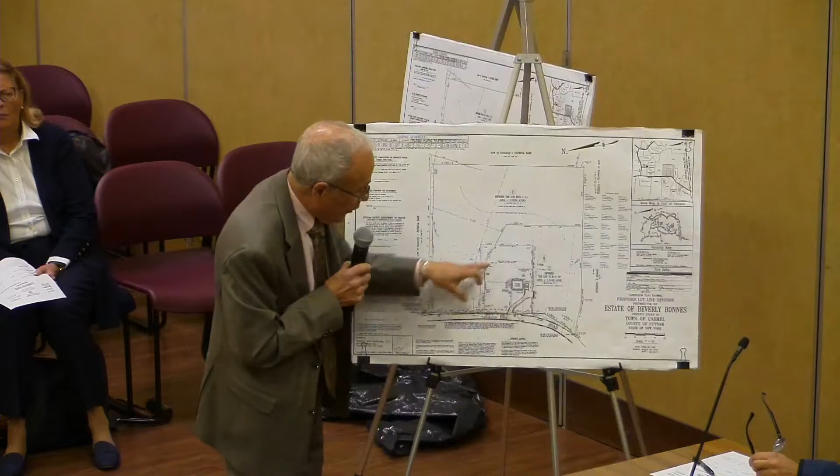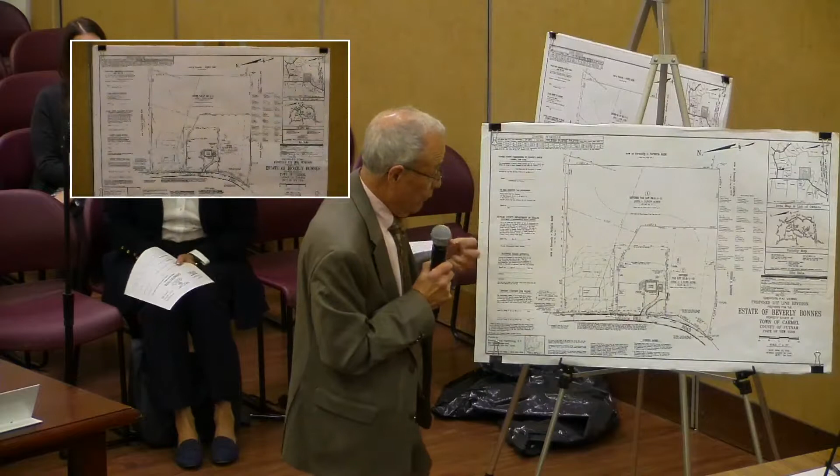That's a very good point, Mike. That's why we had to make the lot the way we did. But the interesting thing is, even though this lot doesn't have 3 acres, the lot width and lot depth are now conforming. We've made the area much more conforming, yet this lot is 3 acres and now is able to have a lot width and lot depth that conform. So we're actually making both properties a lot more conforming.

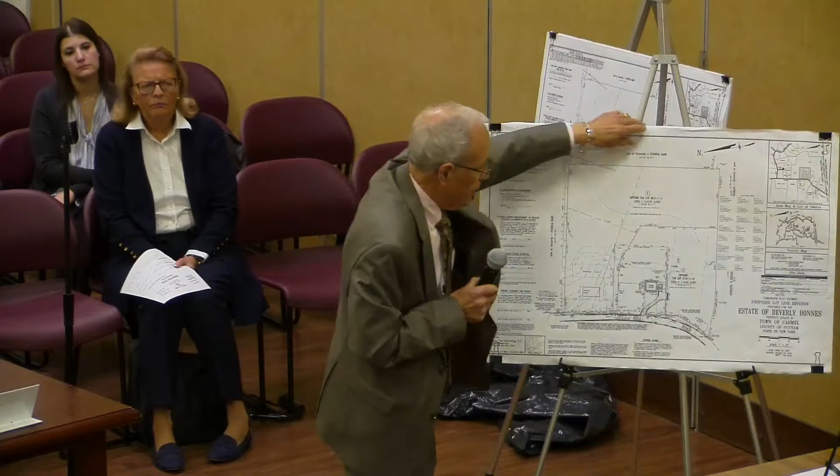Joe, can you trace out the proposed lot line adjustment with the existing house? Well, it's no longer a lot line adjustment, it's now a subdivision.

This represents the lot with the house, and right now, this is 33,000 square feet. This, which is the rest of it, is a little bit over 4 acres. So what we're doing basically is taking this part of the leg of the existing lot and adding it to this lot, bringing it up to 80,000. So this now becomes this.

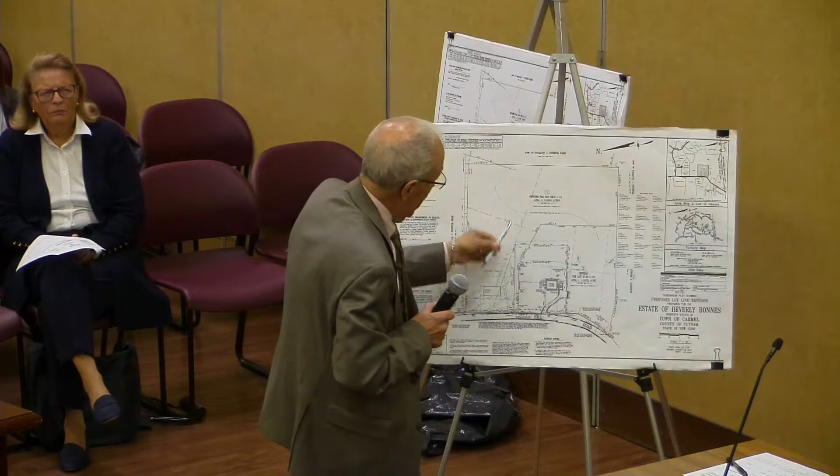As Michael said, we have 3 acres here, but because of the configuration, we're able to create a conforming lot width and lot depth, and this lot goes from non-conforming lot width and lot depth to a conforming one. But again, we need about a 40,000 square foot variance because this lot is 80,000 instead of 120,000.

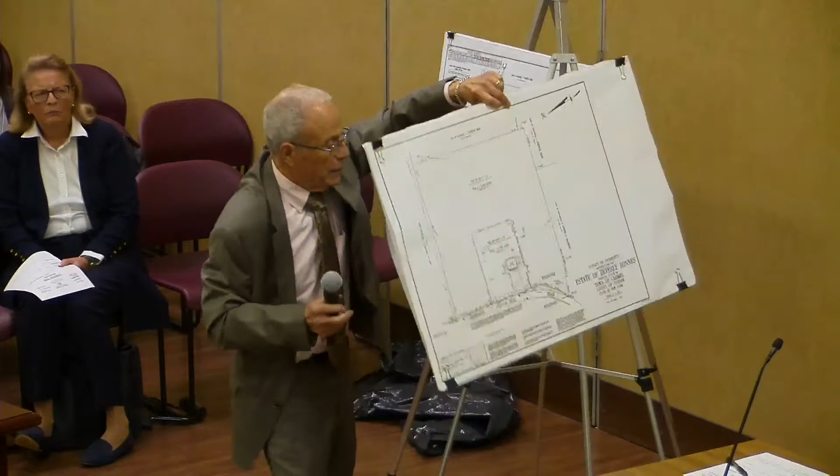Is the building on the left proposed? Yes, this is all proposed. Right now this is all vacant. Our code requires that you make a building lot, you can't just make a vacant lot. You have to show that you can put a house in with a septic or a sewer, depending on what you have.

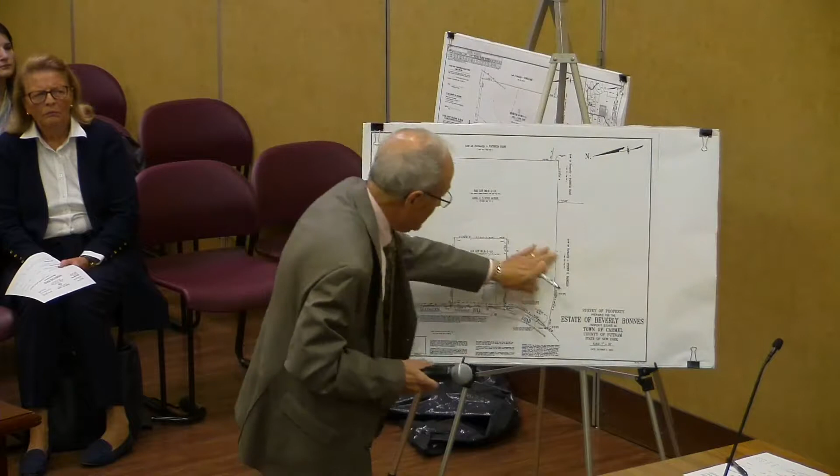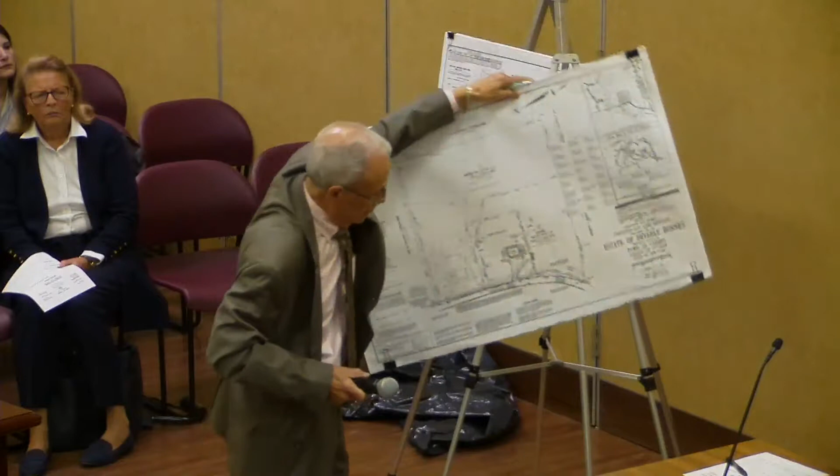So this is what it looks like now. What we're doing is adding onto this lot, getting rid of this out of this lot, bringing it down to 3 acres, just 80,000. And as I mentioned, we did do some testing for the septic system in this area over here. We found that to be acceptable and approvable for a septic system.

Did you locate the existing septic also? Yes, the existing septic is over here, on this house, behind the house. The well is up front, and this new well also will be up front.

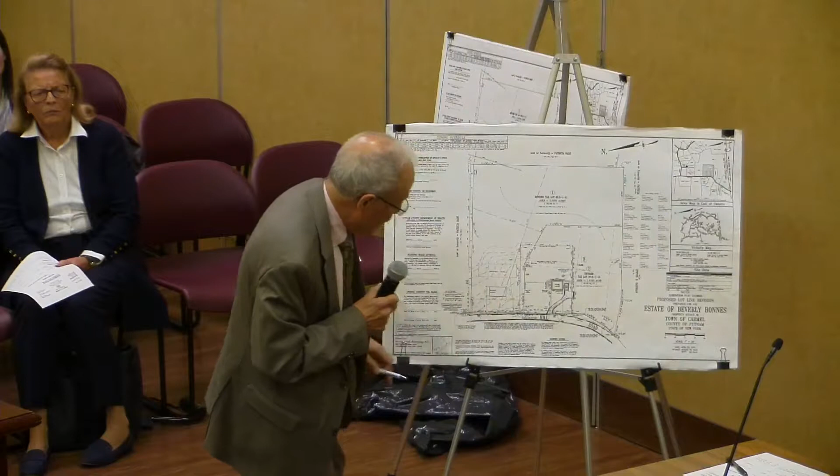Joel, what will be the left lot line of the existing house property? Is that square or rectangle? This is the existing - going on the left side, to your right, there's a box there. What is that? Oh, it's just a fence enclosure like that before going. Oh, okay, all right, it's not a structure. And what's to the left of the property? Bobby, microphone - over here, there?

Okay, is this on the record? Just speaking into the mic. My mic is right over here. No, my mic is off.

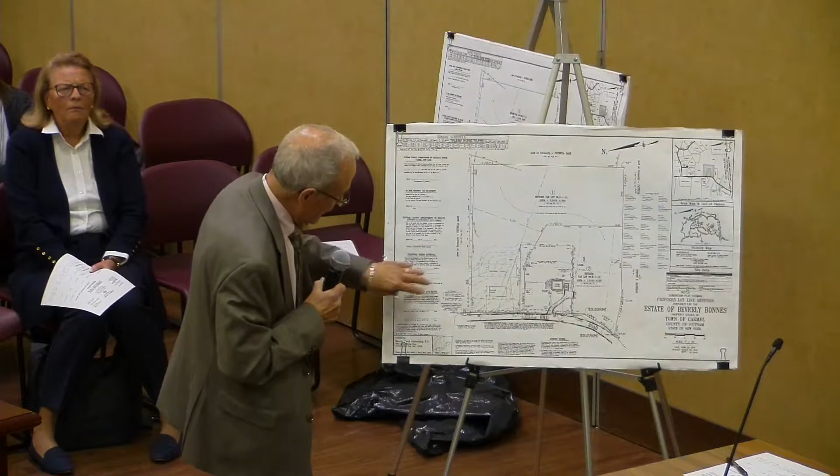There's a big yard over here, and there's a house just about over here where we have the planning board stamp. So this house is over here. Again, wells in the front, septic's in the back, all along the street. Because of topography, it makes sense to have the well at a higher elevation and the septic below.

Are you planning to bring any soil in? No, we tested it here. We were able to get down to the 7 feet that's required by the health department. So we're not taking any soil away, we're not bringing any soil in.

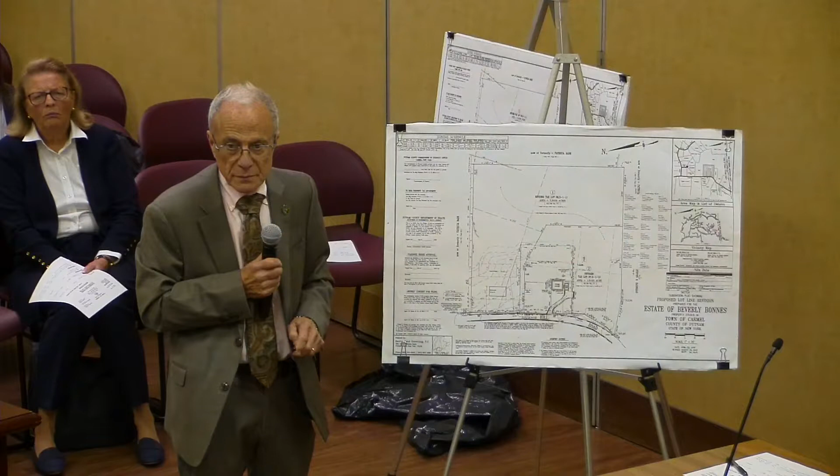But basically, the lot will look just like that? That's to be determined yet. Right now we'll take Joel at his word, but the devil's in the details when we get to the next couple of layers. Right now we're at sketch, so that hasn't been considered. He's saying there's not gonna be soil brought in, so we'll take him at his word on that, but we'll see what happens when the final plans come in.

What are you talking about? I mean, we did do testing here. We got 7-foot deep holes. But if the new people come in and they buy the lot, they may change the topo or do something. There's so many things that could be. But that's not the point, is that once this submission is approved, it's approved based on what we have, our testing.

If a new person comes in and they do something else, we may have to talk about the grading for the house, the grading for the driveway, not just the septic system. So there's more - there may or may not be fill needed for the grade of the house to keep the property level, to make it a level property. Don't know that yet.

Well, again, if you've been to the property, you can see the topo lines here. They're pretty far apart. The grade here is probably less than 10%, maybe 7 or 8%. Anyway, the point is, we can't do anything unless we get approval from the zoning board for the variance. And if they were able to go with the lot line adjustment, they would not have needed the variance, just to be clear.

That's why it was a little different. The problem, as Mike said, is that it's more than 20,000 square feet. That's why it's a subdivision versus a lot line adjustment. It's a technicality in the code that was written a long time ago.

So Joe, the frame house that's there, is there anyone living in that now? Yes. Is it the same owner as the other lot? Yes. And so they simply want to revise the lot lines, create a more conforming lot here, and obviously keep this conforming. So what's the intent with the other property? The intent was this will remain, and this eventually will be sold. So they're not gonna build on it? No, per se there's no plan, it's just a buildable lot - anything can change, but right now the plan is not to build it, yes.

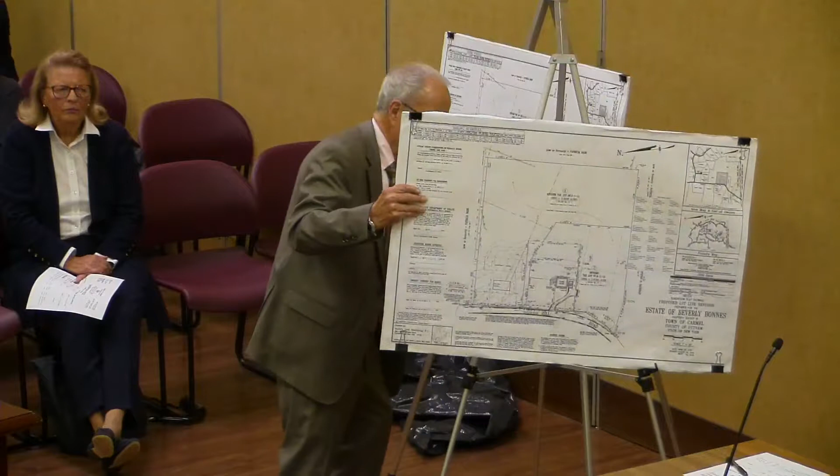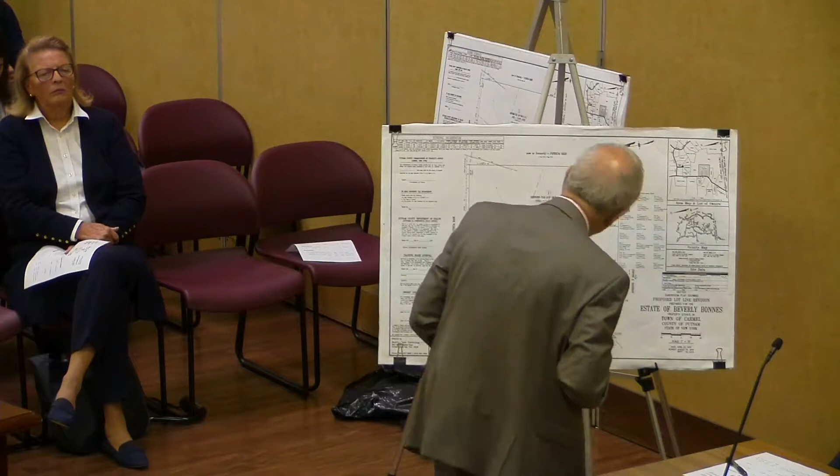What's that road, or some sort of drive indicated coming in with those two sets of parallel lines? What is that, some easement? This is the traveled way, Shandaken. Upper right side of the smaller lot. There, those two dashed lines run through the whole lot. What are those, and what's that other set of dashed lines coming in from the side? Is that an access way, a driveway, what is that?

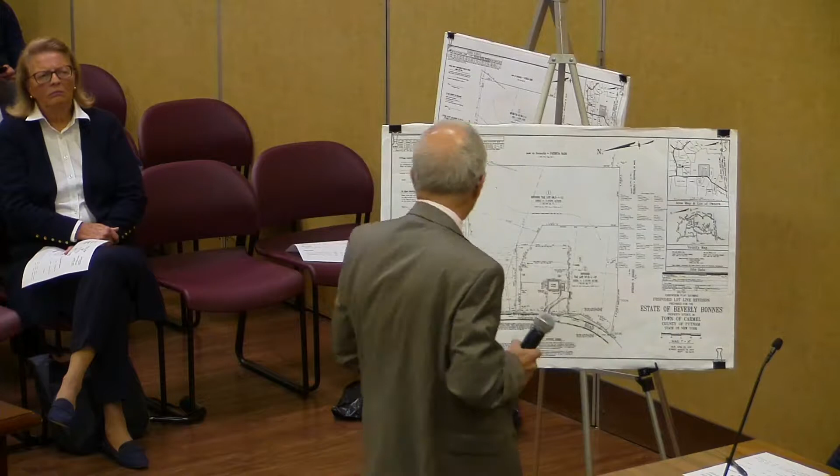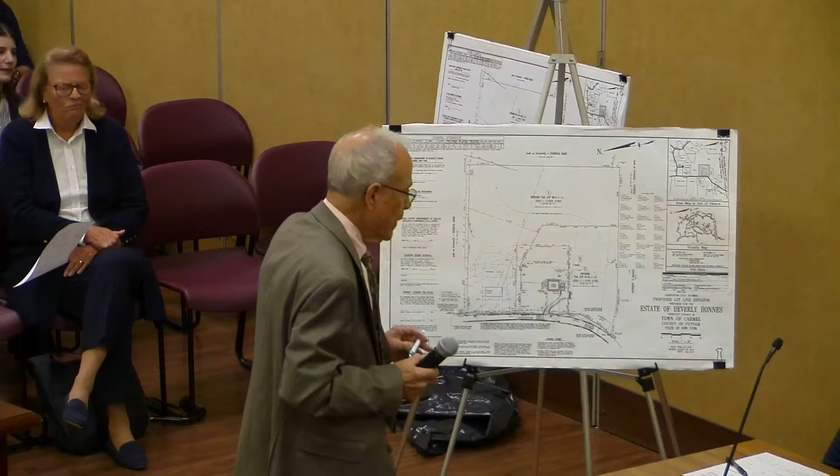It's nothing, I guess it was what they called a wagon road. I don't know what the wagon was. There's no right of way on that, is there? No. We have a copy of the deed, there's nothing in there.

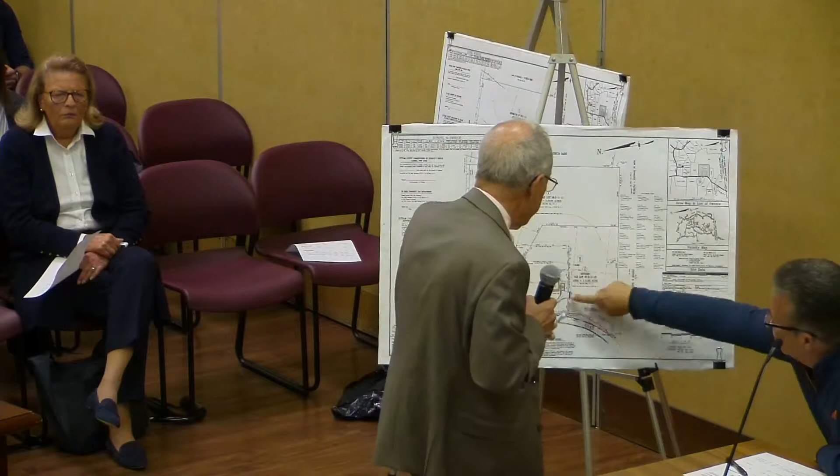So those two dashed lines, what do they represent? The two parallel dashed lines? The lot width and lot depth. And lot depth, here. This line, I have no idea what it is. Let me just check the survey, hold on.

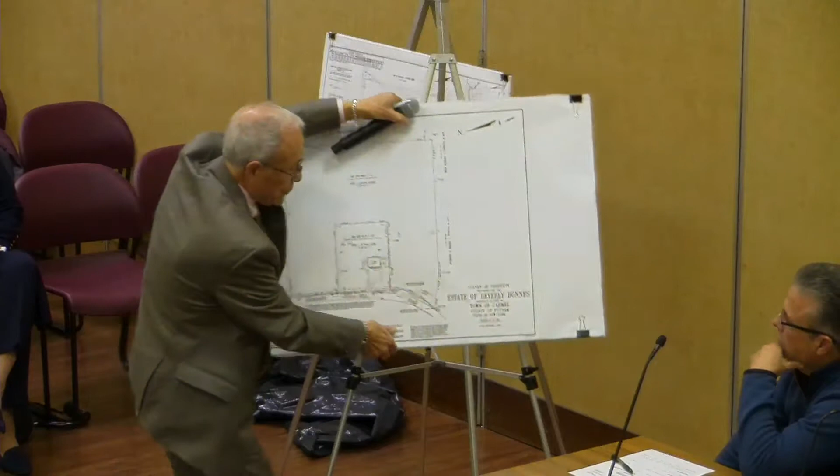If you look at the survey, the only thing shown is the old wagon road. I guess that's why I asked the question. If there's new lines on the new drawing, I'm wondering what they're for. I don't know how they got on there. Joel, could you confirm the wagon road has no easement or right of way from the neighboring property? I looked through the copy of the deed, yes, I did.

So that's a path that doesn't mean anything for the future use of that property? No, absolutely not. And what's to the right of the property? Another house. And where's the house? The road starts turning over here, so the house is in this area, in front of the septic. The property slopes down about 9% this way. So all the wells along Shindagan Hill Road are in front, and the septics are in back. There's a house here, and a house here.

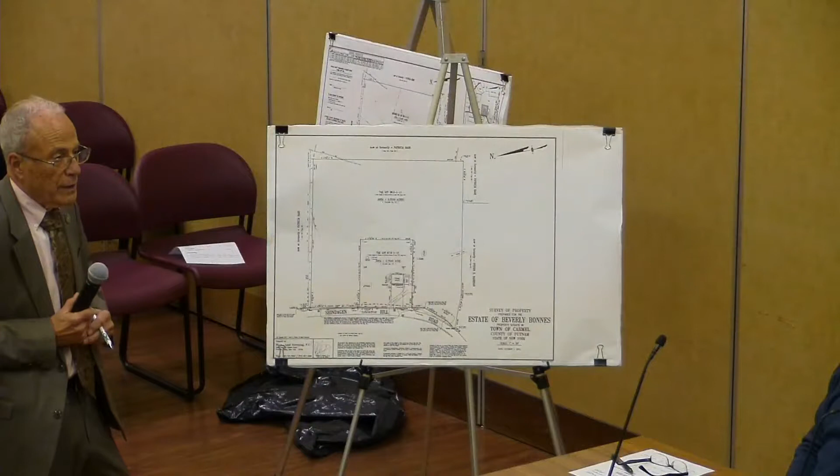So the only variance is the amount of transfer for the lot area on lot number 2, because it's still under as much as they're giving. It's still under, but the frontage they still have for the other lots is adequate, and all the setbacks are met. It gets closer into conformance, it just can't ever be, with the 5 acres you need at least 6.

Do we have a motion to deny to the ZBA? I'll make a motion to deny the applicant to the zoning board. I'll second. All in favor? Aye. Any opposed? Thank you, Joe, thank you very much.

Joel, you want to bring that up so Craig can stamp it? So that's good then. Do you have the stamp? Let's stamp it, stamp it denied. Oh, of course. Joe, how many times have you been here? Too many, no. Should have your own stamp on it. Oh, he does.

Joe, what's the nearest cross street? It's, look on the, okay, what's that? Wilderness Trail. Thank you. Also, Somers Hill Road is not that far away too, you go down the street. Thank you.

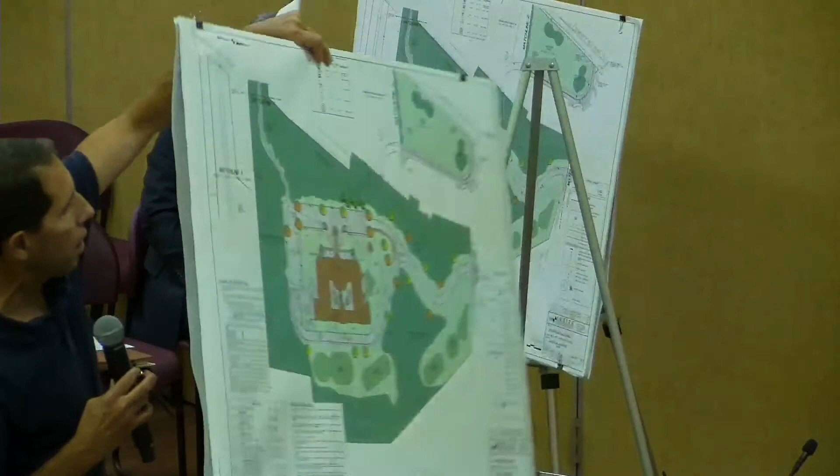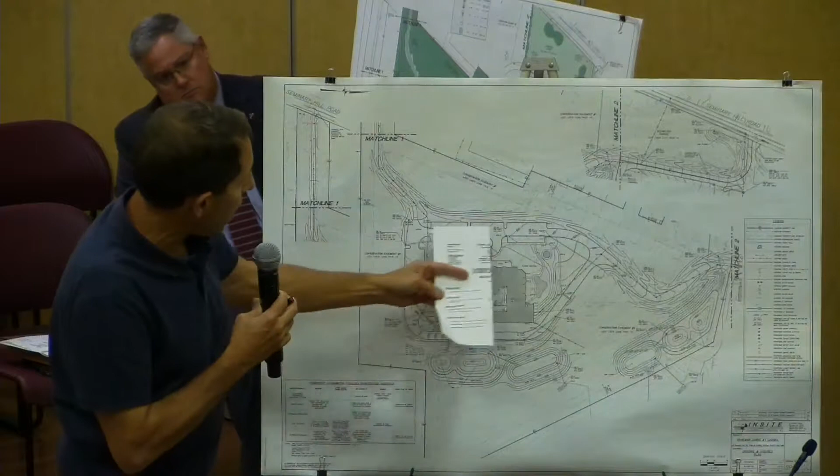We did provide a bit of screening in one spot, and I want to show you why we picked that spot. There's a little bit of a grade change that happens there, and we're probably 6 feet below the existing grade with our parking lot. Then it starts to even out through here. So the thought was to provide some screening there because there would be the happenstance for car lights or something to come through.

The architect suggests we discuss this line with you. As you can see, there's a pretty significant undisturbed area that would stay intact there. This one's probably almost 200 feet, and this one's maybe 100 feet. So the question is, is it worth extending the screening line? If the board believes there's benefit to that, certainly we would consider it.

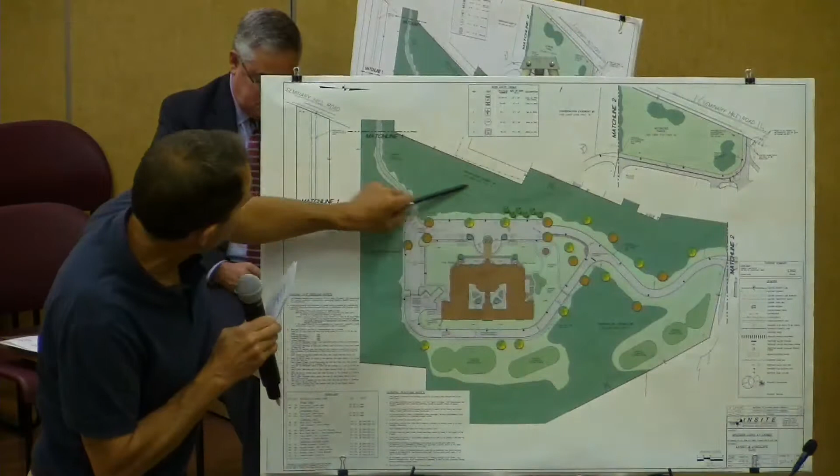Is that a buffer easement, or is that just a buffer from the previous owner? There actually is a conservation easement, and it's quite extensive. It comes down through here, comes back up around and into here. We're actually preserving quite a bit more, particularly in this corner, as you can see. Any further disturbance of that area would require us to come back and see you.

And that area is treed, it's very thick. Yep, there's significant trees in there. I'm not going to say the understory is thick, but there's certainly a bunch of significant trees throughout.

So Jeff, I'm going to recommend that you extend that planter beyond the traffic circle, since you'll have vehicles moving in and out of that porte cochere and so forth. If you at least extended it to the end of that, I think you're covering what would be the impactful area.

No problem for us. 50/50 chance to get that right. How'd I do? There's always some disagreement. Yeah, I think if we extended 3 or 4 feet, that's fine. We'll do it.

What about your lighting on site? When we responded to your architect's comments, we pointed out that our lighting plan does include a cut of the light we're using. We're using dark sky compliant LED lighting, state-of-the-art lighting. We've provided a lighting plan that shows the throw of our lighting, and the detail is on the plan, so I think he might have just missed it. That has to do with the site lighting. The building itself will have downlighting, and David can talk about the lighting associated with the building itself.

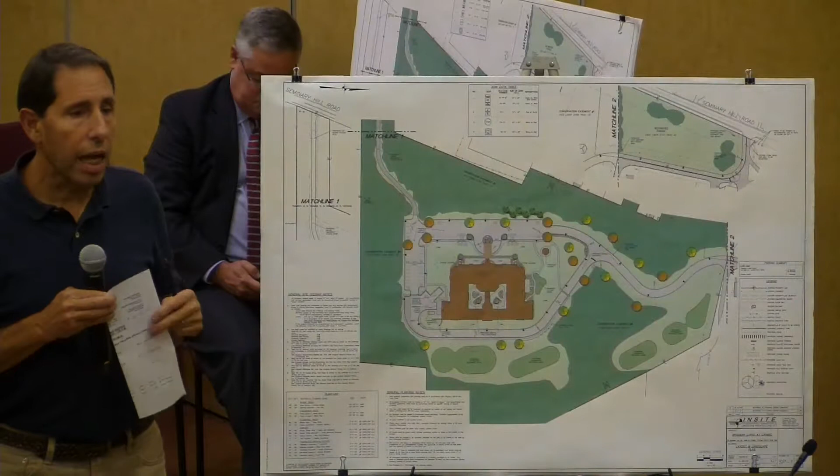But our lighting plan shows that we have a properly lit yet sensitive lighting plan that doesn't spill much light out beyond the intended areas. Are there cuts available on those light fixtures with the photometrics? They're on the drawings, yes. I believe the architect missed that. We addressed that early on, and it was added in one of the early reviews of the project.

Jeff, can you put the renderings up for the cameras as well as for us? I know we discussed this a little bit last meeting. Are there any other questions? I'm going to pass the mic to David. It's fine, that's fine.

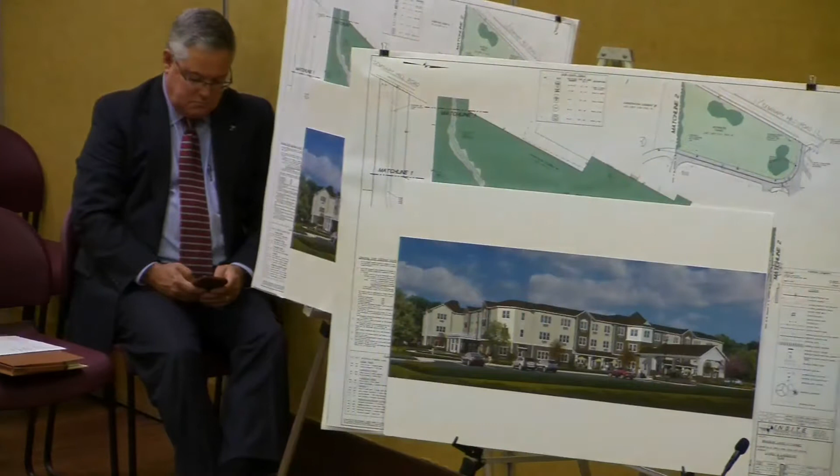Hi, David Mamina, H2M Architects and Engineers. As was said, I'm Director of Healthcare at the firm and the architect for the project. We've done a number of projects with the Pulaski family throughout Long Island and the Westchester area. I think the architect made constructive comments, and I think it helped enhance an aesthetic that we already had going from the beginning, so there was a nice collaboration there.

In terms of the lighting, really the only lighting we would be proposing would be downlighting underneath the drive under the porte cochere, and that would be lighting completely flush with the surface. No part of the luminaire would stick below that, so we're not going to get any spread to the sides from that, it would be straight down. Same thing in those canopied outside areas, but along those walls there would be decorative sconce-type lighting that's more for ambiance and to put some immediate light where doors would go into the building.

So other than that, the site lighting plan, which you've all looked at, is extensive, and the photometrics show that it does give adequate lighting. Generally we prefer the site to be much softer, and the attraction would then be as you drive up.

Oh, that's not us, okay. So wait a minute, someone's talking to me.

Well, you can achieve that based on your color. Yes, I think we could do it easily, go with a softer LED. Yeah, and it would make it really, really handsome. It would be nice. So I think unless there are other questions, I'm glad to answer them, but we did answer all of the questions for the architect. We spoke with him, and I believe he was satisfied with what we had put forward there. Again, it should be a nice-looking building that's going to contribute nicely to the community.

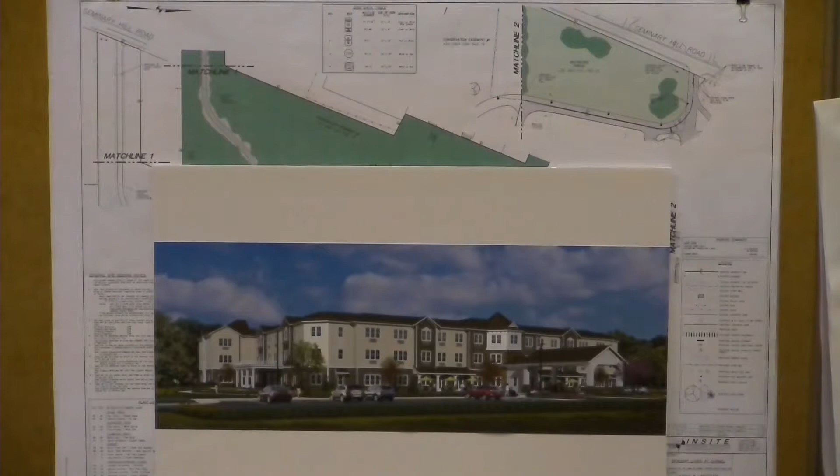Mark, last meeting you mentioned, Anthony and I were just discussing it, you mentioned the size of the clapboard. Did you have a comment? Wasn't it like a 6-inch or 7 that you made a suggestion to change to a 3? I think Kim brought something up and there was discussion about you had 4-inch and maybe go to a 5, double 5, because of the size and shape. But that was, I thought you might have addressed that. I think it was addressed in the letter to the architect. I do remember seeing it in there.

I think it's a sharp-looking building. I actually agree with you, our architect helped out quite a bit, and you have a nice piece of property going forward, right? Anyone from the public wish to be heard on this?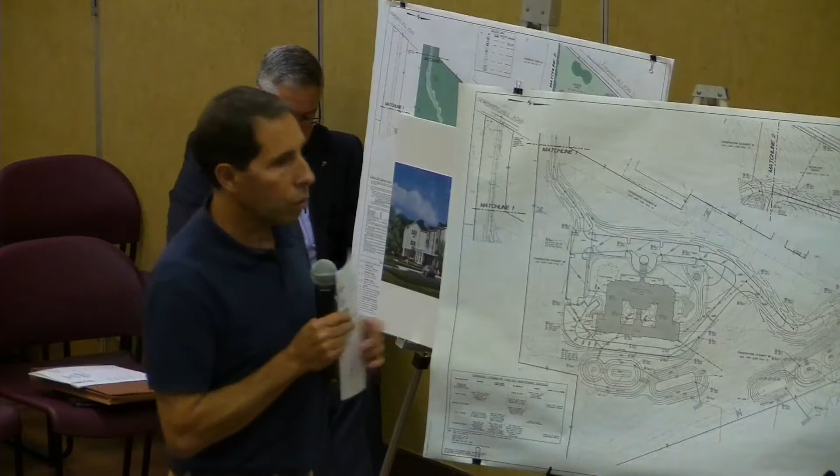We've prepared a fairly extensive stormwater pollution prevention plan showing all the numbers and details pertaining to that. Where does that water ultimately go? I'm gonna say Lake Gleneida, all the way down, and I think it might even cut through where the bikeway cuts through behind the old restaurant. But the vast majority of the runoff we're dealing with makes its way to Route 6, out and back.

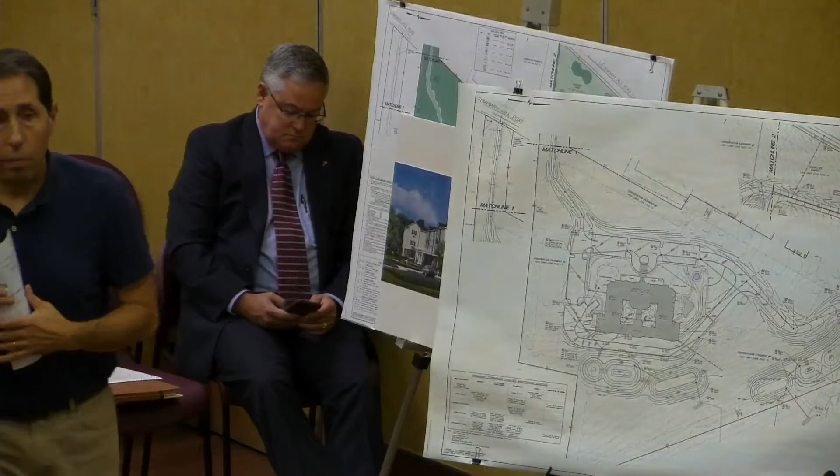So it's fair to say the runoff tomorrow, so to speak, will be less than the runoff today? Right, less than or equal to. That's our standard that we have to meet.

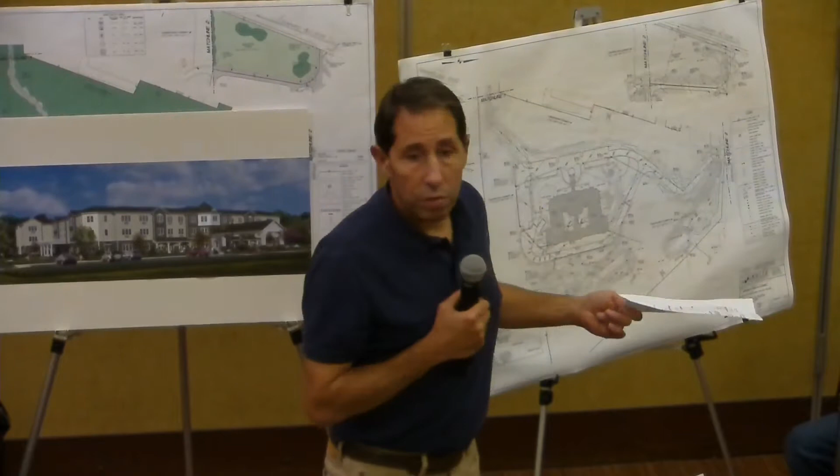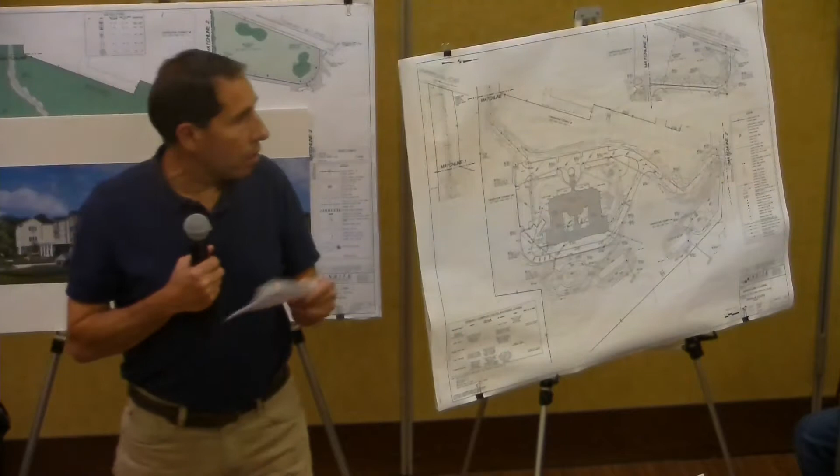And that combined trip generation as far as traffic was going to be actually a bit less than what the Guidepost was. At present, the proposal is for the distillery to go into the old Guidepost establishment, and for the assisted living to come where the former office building was proposed. Again, that cumulative traffic from those two uses is still less than what the Guidepost facility at one point was generating. The assisted living facility itself is a very low traffic generator. I believe the numbers are in the order of 50 trips during peak hours, meaning 25 cars in, 25 cars out. And the peak hours, I'm going to say, are probably when your biggest shift comes in at 7 in the morning, since they have employees 24/7, but their biggest employee group is during the normal daytime hours.

So their AM peak would be between 7 and 8, and then your PM between 4 and 5 exiting.

Okay, 3 to 4, so those are a little bit off of what the true peak is. But again, the first place where you would see traffic issues would be at Church Street and Route 6, and the numbers we're talking about are very minimal when you look at the capacities of those intersections.

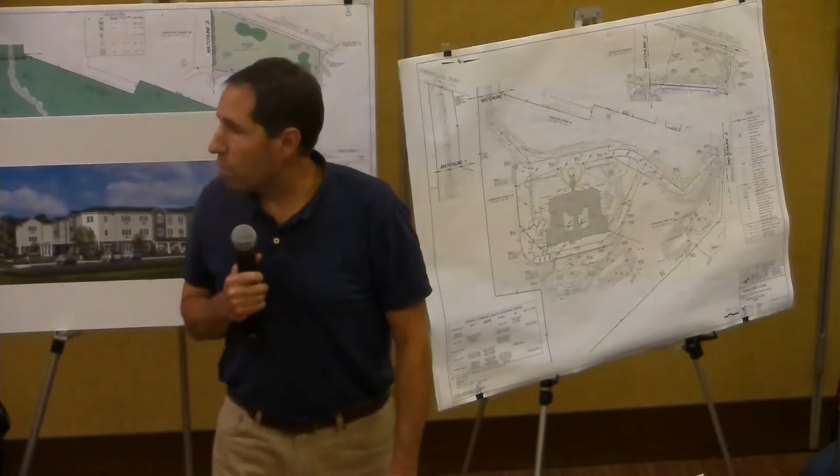And what is the anticipated number of employees? Full-time, FTEs are about 80 or so, and the max shift would be in the 40s. So the total full-time employees for the facility would be in the order of 80, and the max shift would be 45. That should give the gentleman some idea of traffic flow.

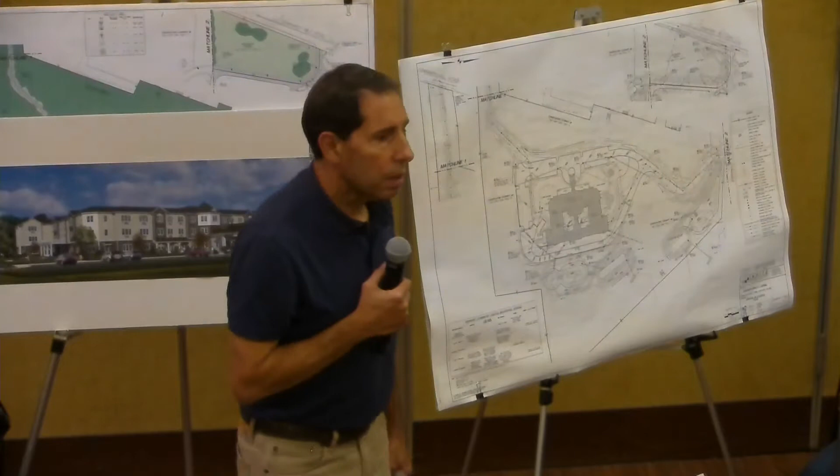So it sounds like around 700 trips a day, because there's going to be people living there. Say someone leaves and comes back once a day, or someone has a visitor who comes once a day, 200 people, one trip in one trip out, 400. Another would say that's 500, two people in and out, 3 shifts. It's a 156 bed facility I believe, but first of all, the residents aren't driving and coming and leaving. That's the first thing. What's the average age of the folks in these facilities?

Can I ask, you might want to respond to the question, maybe you want to get a microphone.

So we did present traffic numbers, I apologize that I don't have the report here with me or the numbers at the top of my head. But just for the gentleman's benefit, traffic isn't measured in cars per day. Traffic is measured in the rate over a short period of time, because that's where the problems would come up. So when we talk about traffic, we talk about trips during the peak hour, because that's where it's most sensitive. And this assisted living facility, very few of the people here would have a car, and most of them are there for the day.

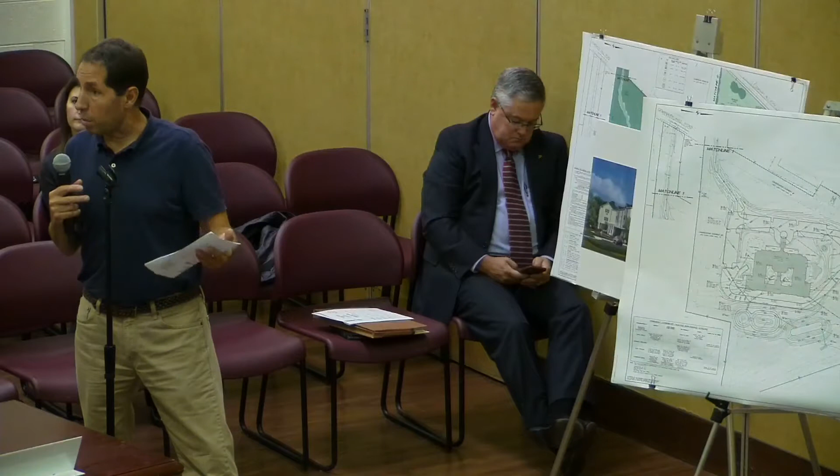There are services coming in, there are visitors coming in. I'm going to let Richard speak to the general numbers on that. So of the 152 residents, 2, 3, 4 will have cars, that will be it. They live here, they stay here, all their activities are here, all their meals are here. Their medical services in large part are here. There'll even be a provision for physicians to come on site.

So you indicated the average age is mid-80s? Mid-80s, yeah. They're just not driving, and their whole social life and their activities of daily living all occur here. We'll have probably a 12-passenger van that will take them out up to twice a day to either go shopping or to different activities in the community. Historically and traditionally, assisted living is one of the lowest generators of traffic anywhere. It's just the nature of the population.

So you don't have to worry about— do they have no visitors? Probably, on average, there'll be probably 10 visitors a day, something like that. And generally, those visitors don't come during the peak hours? Yes, weekends, nights and weekends when we as residents would be at home. Visitors will come on the weekends, and they might come in the evenings. Again, you're talking about a handful of people, 10, 15, something like that.

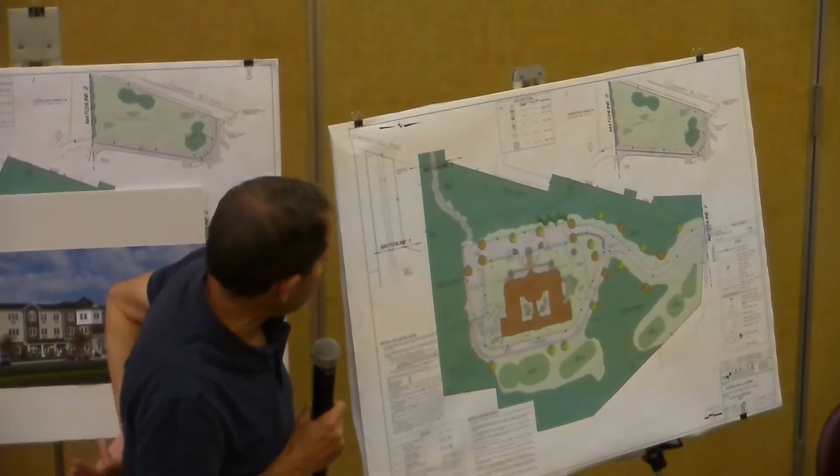Depth of your lots are a couple hundred feet, so Seminary Hill's out here. As Mike pointed out, we're proposing to leave this dark green area undisturbed, so that'll continue to be forested as it is today. There is a bit of a grade change from this area down to where we would be.

The planner this evening asked us to extend our screening. We got some evergreen screening in this area where the grade is a little flatter, so we're going to extend that back. He asked us to expand it back into this area, so we believe there's going to be a fair amount of buffering there based on both the distance and the evergreen plantings.

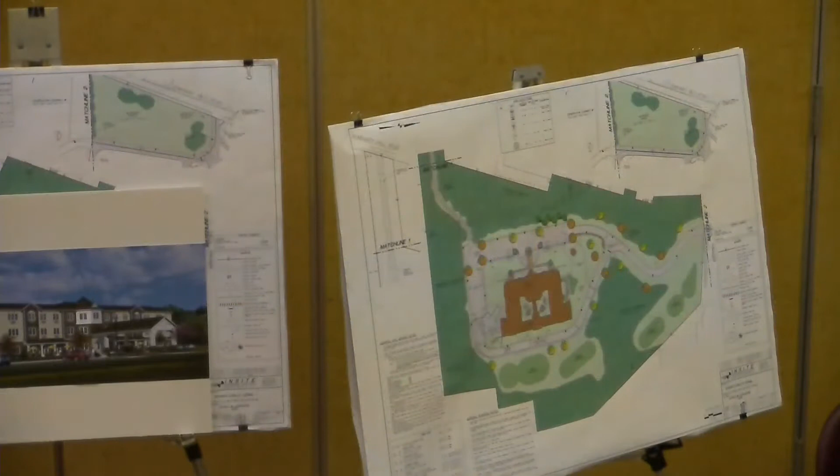I just want to say that I hope that when you're hiring 80 people, you'll try to hire people from our community as often as you can. And my second question is, this project, from breaking ground to when you finish it, how long is it going to take to get up and running? So I would estimate construction at 24 months.

And in terms of your question on employment, we would love to have everybody be locally employed. That would be a benefit to the building. Rich, I'm sure a lot of people had similar questions in the neighborhood that just didn't come out tonight, so it would be nice if you do a little outreach sometime along the way. Sure, we can do that. Yep, might help you with your employment also. That would be, we can do that.

We'll arrange something. For the additional 50 beds, where is that going to go for the other phase? And then what is the kind of expectation for that phase of the project once we get there?

We disclosed to the board that we've provided space for future addition should expansion be something that's desired. We're not seeking approval for that. We just wanted you to understand from a planning standpoint, spatially, why we've arranged the site the way we had. To answer your question, there's two wings, one on this corner and one on this corner, that are contemplated. Richard can speak to the timing of that, or the lack of timing. There really is no timing for it. It's just potential down the road, but there is nothing scheduled for it.

But Mike, they would have to, oh, go ahead, please. They would need to return to this board for any additions they do to the site. And there will be another public hearing and the whole runaround again, the same exact thing. You get your chance to speak and explain why it has not been a good project, if that's the case. But with regard to that, the current parking layout is sufficient, should that occur? I believe that's true, yes.

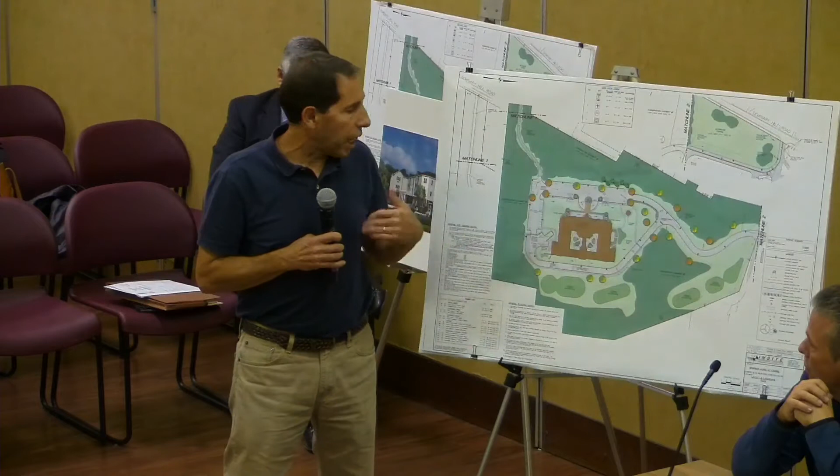And as proposed, the parking needs for this facility, as we discussed very early on, are very low. And we do believe we have ample parking, way over what we really will need initially, and certainly covering us into the future.